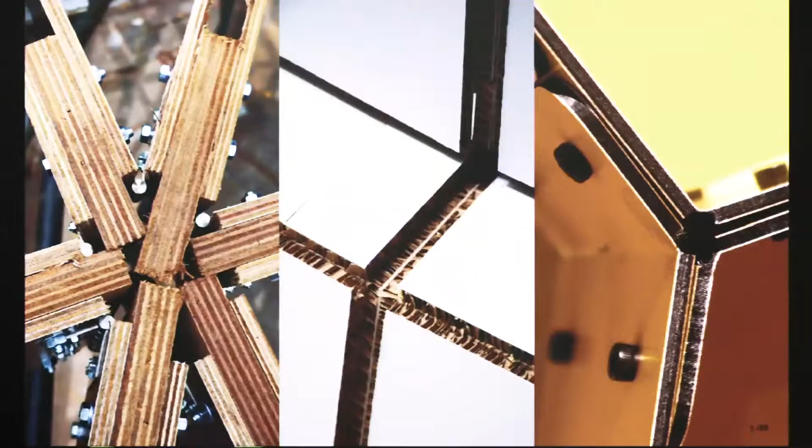And now I briefly stop on 3 projects, which all had slightly different aspects of what we learned. The first one on the left side is the SUTD Pavilion original project. In between there was a paper project for the exhibition, and the third one on the right is the tab structure. I don't think we have given it a proper name so far.

So we were given a site, so what I do now is go from the big picture to small and back again. So that's the site. Then we designed it; it was a cafe in the beginning, but it turned out that we can't put in the water and so on. So it was just a shelter.

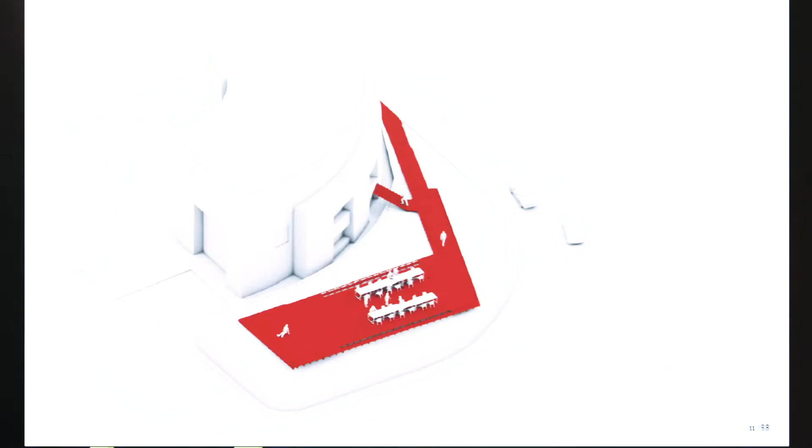There was a line network we were tweaking around. And this line network was very important to give us flexibility, and also for communication with other parties who were doing calculations. It was easy to communicate with a very simple geometry, but just the lines don't describe vectors, so we had metadata for the lines. And I used Rhino, which has all these options to embed extra information.

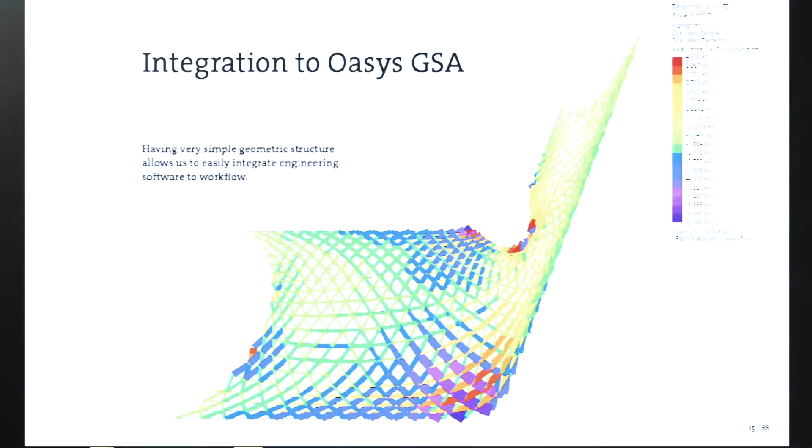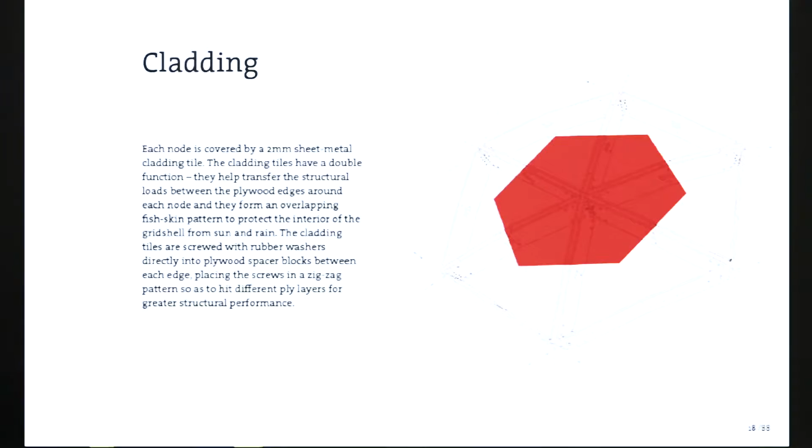So that was our engineers trying to find out how the structural layout works. Then we got the engineering data. Based on that, we made the dimensions and cladding, and the cladding was an important structural element because the forces through the axes had to travel as short as possible for this kind of degree 6 network. Usually you have a lot of bypasses.

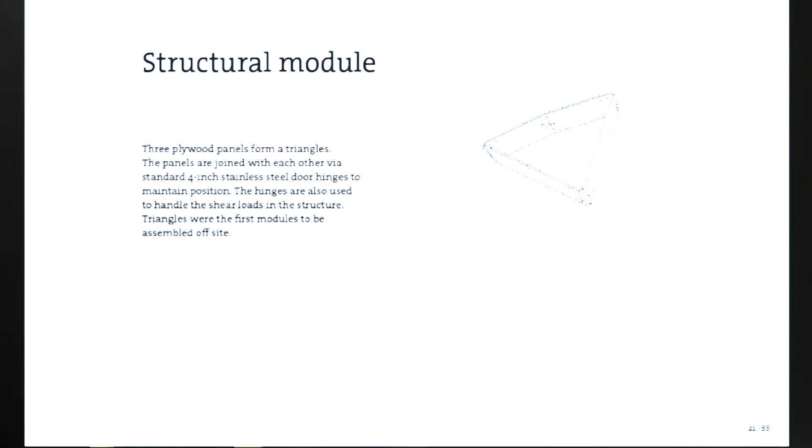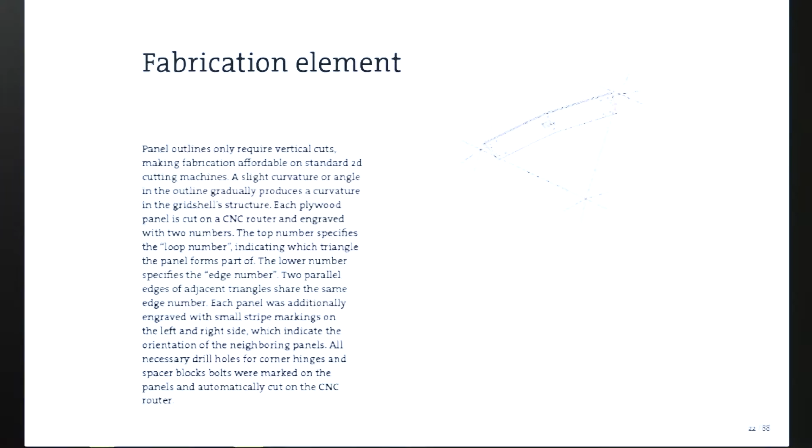Then we had this site module, which was easy to assemble, and this small structural element, which was a triangle, and the fabrication element was this very small, thin plywood element. What happens with custom-built software is usually you write things for different representations. You need to write things for 3D, something for 2D, and they split up, and you hope at the end of the day they all come together.

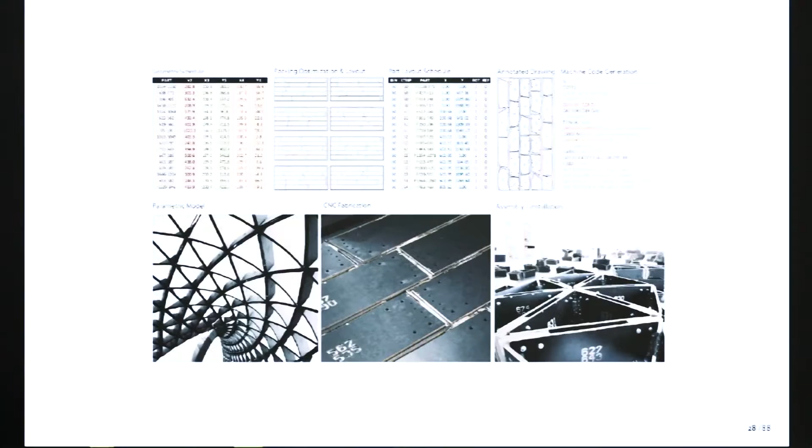So what we did is we took this structural element, used the layout of the quad, packed them, added extra holes and also embedded a numbering system, because if you cut something once, you want to make sure there are no mistakes, so we wrote all the numbers directly on the boards. These boards came out of the CNC, and that's a brief overview of all the data going through and coming together.

So everything landed in one of the sites where we sorted things on the shelves. It was partly student involvement in the project to show them how tedious it is to put together all the architectural sites, so next time they know when they design that somebody needs to work on that.

Hinges were purely a temporary solution. They didn't carry any real force, but the idea in the beginning was maybe we can do the hinges and then they can start carrying the force. Later on, the hinges stayed, but they didn't work anymore. So the project usually evolves during different conditions, and some things become redundant at one point, but they still somehow stay.

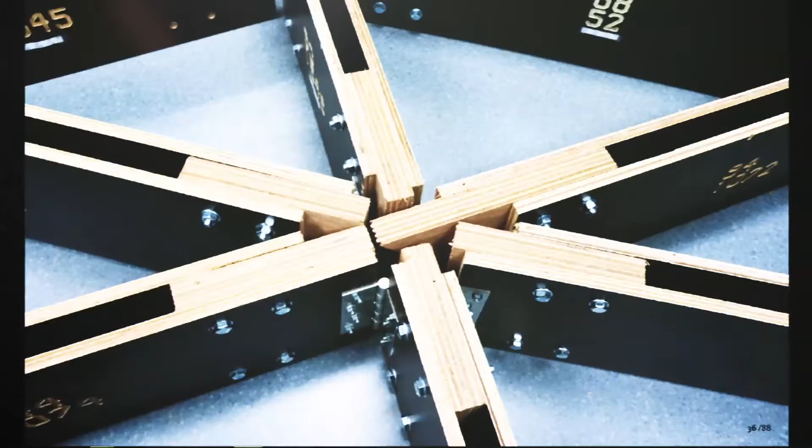Assembly process, sorting, another set of components in between, lots of different sorting and assembling, and it just goes on. It took us like a month to put all this together. It was way too many components by the end of the day, because it just piled up. First we thought maybe we could get through with one part, then it turned out we needed four, and then this single node had 110 components. So we weren't very happy with the result on that front.

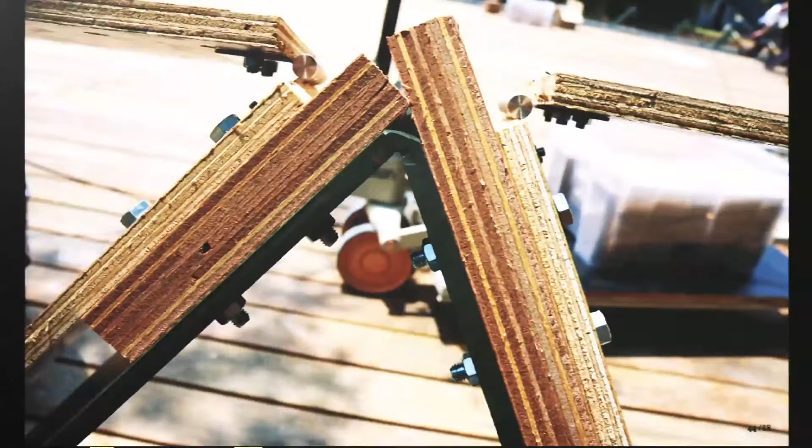So just going through a couple of images. Now the site work, that was only construction document on site. Since everything was embedded on the structure, you just need to guide them to where this component should be. Having this embedded system helped us on site, because the person who couldn't speak any language I did, I could explain to him in a couple of hand gestures how things work. I think that was something important in this project too, even though there were many components, it was still possible to describe how this thing should work.

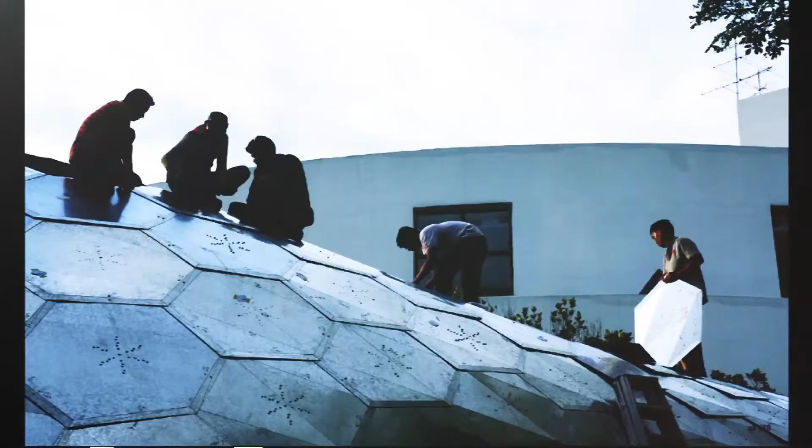Just clicking through. We didn't allow students on site, it was a construction company. And the next project was way simpler.

It was a paper structure. Again, we started with a 3D model. The thing is, the same model can provide the scale model with different joints and the final model, so you actually work with one geometry with multiple different outputs.

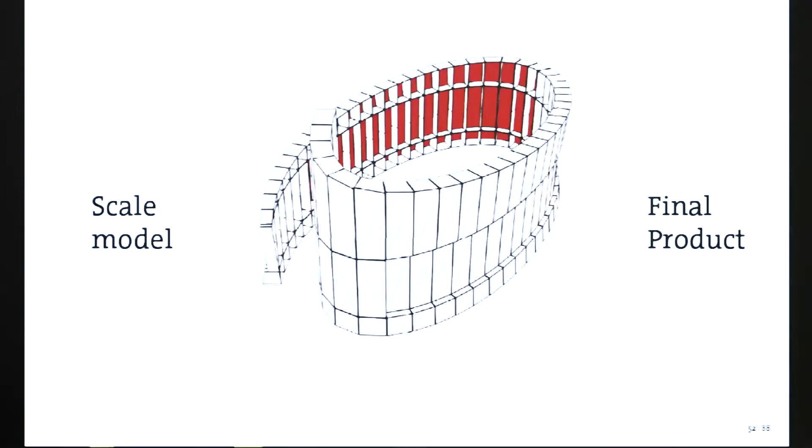In a previous project, we had a dedicated output for the engineers to collaborate. This one has a scale model, because for exhibition you want to get all the graphics right and all the small details. It is very easy, we can do one model every day and just glue things together and see how the small changes affect it.

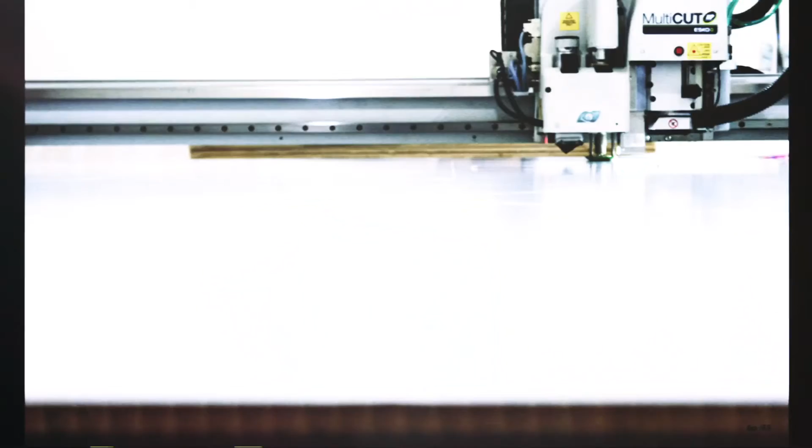That's the final layout for the Re-board, a paper-based material, cutting with a knife cutter. They were printed first, then cut, and then delivered as flat sheets to the site. On site it was just bolting them together. It was a very lightweight structure in that sense, and you just fold them up and everything worked.

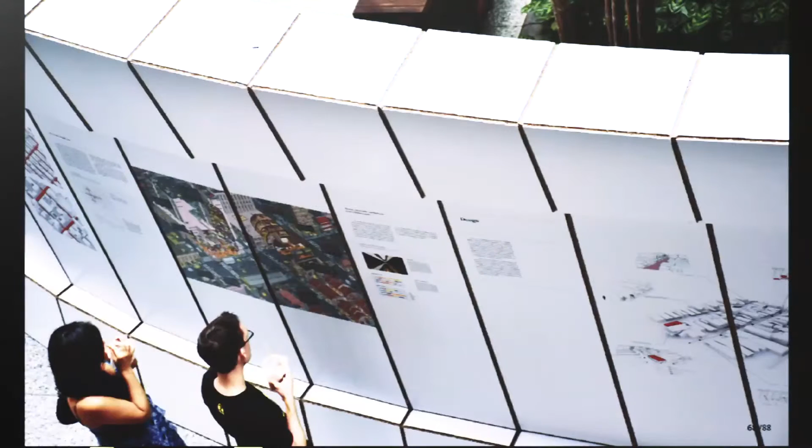Just showing some pictures. The third one is what you can see in the exhibition today, just wanted to show what was happening behind it. Again, we were mostly working on a line network, polylines, curves, anything we can just tweak around. That allowed us to use other software, you can just plug into Kangaroo and do relaxation, and then do the fabrication through this module.

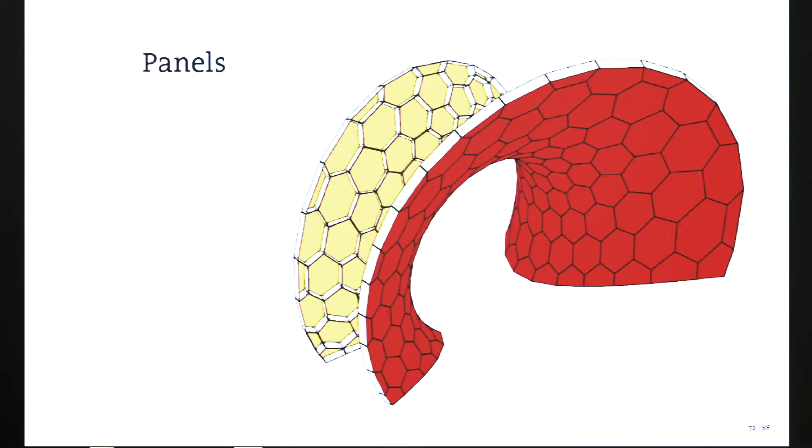There was one guiding surface to just get a sense of what's going on, a 3D representation of how things should look, if there are any intersections, how the bolts fit. The thing is, with the bolts, with the triangles, we found that if they get too close, the hands don't fit. With the hexagons it's much better, they are much more open.

So that's the layout for the CNC. Also, since we used the CNC head which has this thickness, we had to get rid of all the tiny corners to allow the CNC head to travel. That's the process for the CNC.

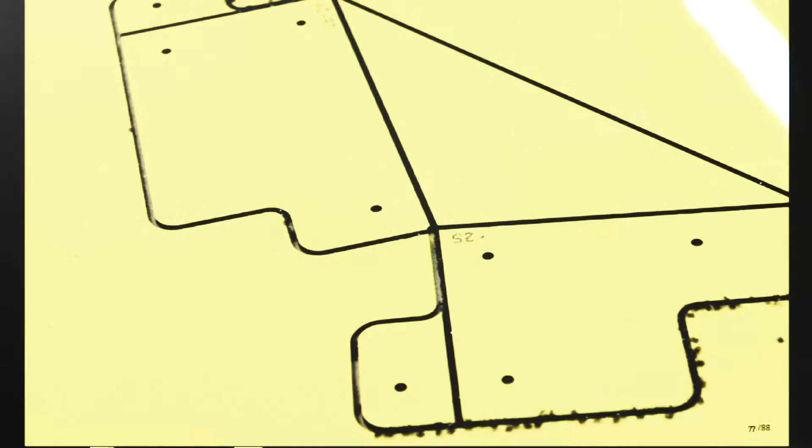Some layouts for the, and again this kind of strange layout. That was the only site drawing we used, with a lot of help from local volunteers. I showed them for a half day what it's going to end up with, so they could just focus on assembly and see how things get put together.

It is very parallel operations, because you can work on a structure in multiple different locations, and the drawings are embedded. It's actually a little bit tedious, but it worked, and it was a very interesting process on that front.

I have, after these images, a small clip to play. So maybe I'll ask somebody in the back to start the movie.

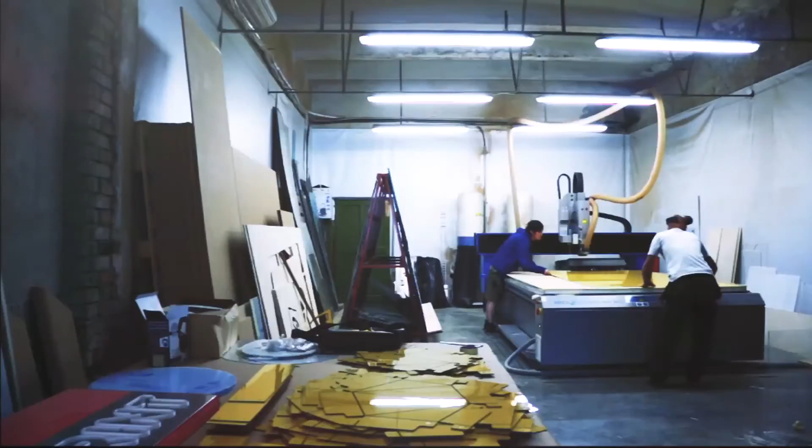That's not my movie, that's not my sound, but... Maybe I should comment, I don't know, it's awkward silence. Because we have a discussion, yeah, let it play.

It was one of the most challenging parts to get another structure on top of the other ones.